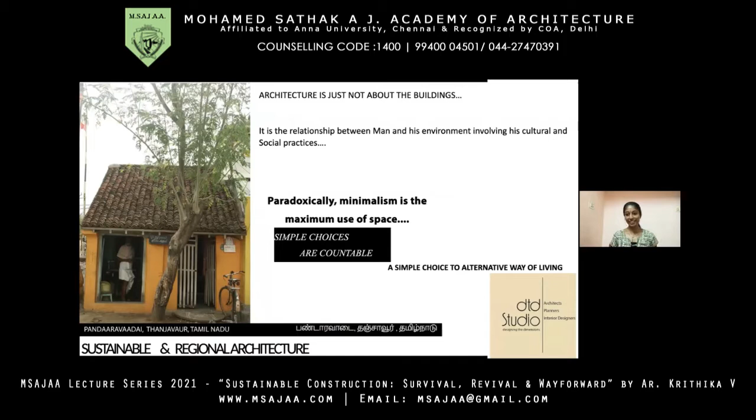So we'll talk about sustainable architecture and what kind of experience we've been taking through for the last two years. It's more about regional architecture and how the relationship between man and his environment, along with social practices, go together. We are actually, as a team, looking into eco-friendly architecture on a holistic purpose. It involves all the decision-making part in the architecture as well as choice of materials and the planning part.

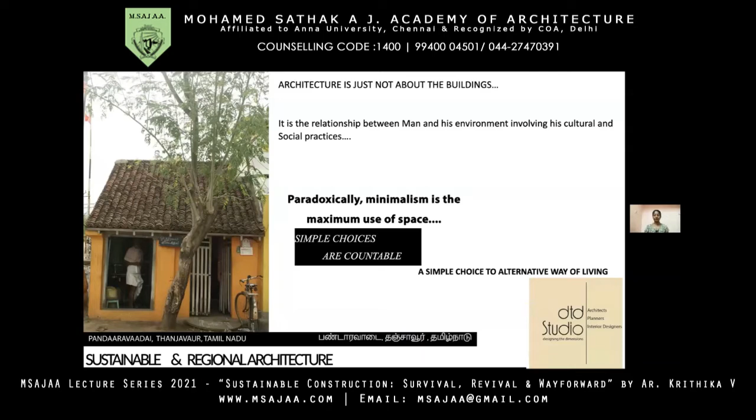Before getting into sustainable construction, I have a few images to be shown. We've always been looking at materials from a perspective from where it is not taken. So these are the images from where it has been mined, and this can actually tell lots of stories behind it.

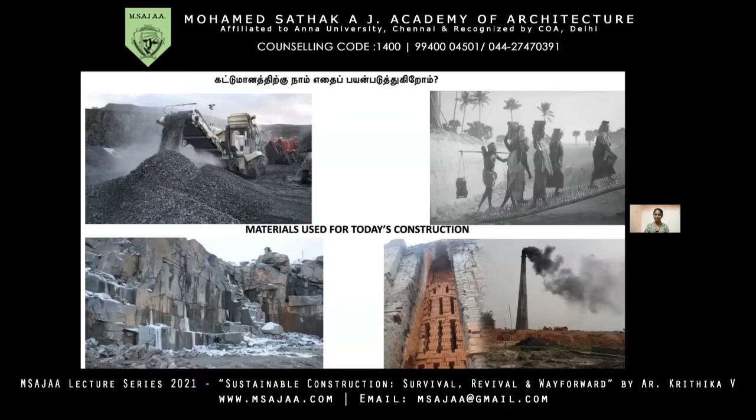So the kind of hazard that today's mining practices cause—we talk about pollution to a greater extent in the world. The construction industry takes a major role in being part of all kinds of pollution, be it air pollution, land pollution, or water pollution. These images represent the mining process and the background story of where the construction materials are actually coming from. So there's a small point we'll have to look into when we talk about mining.

When the resource of a particular land is scraped out, it cannot go back to its original ecology. The environmental assessment principles and policies talk about taking back the mining sites to their original condition, which is not possible once the mineral is out. So these are a few examples of how, when the mineral is scraped out, the kind of condition that it leaves back to the ecology.

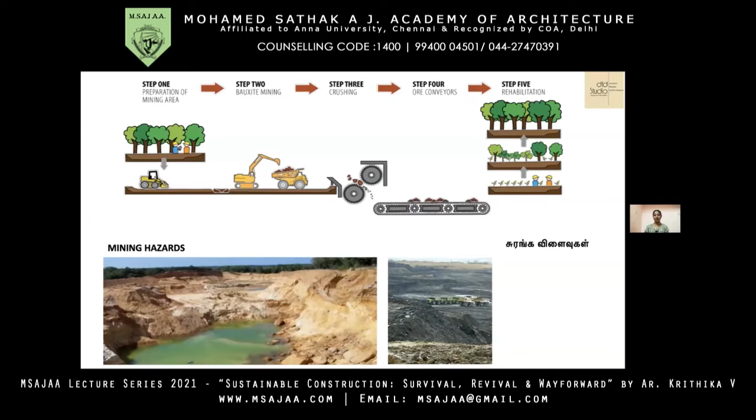I also wanted to talk about a very simple material, cement, which is completely used everywhere in today's construction practice. We look at cement as a binder, but there's more story behind it. To manufacture a bag of cement, you need lots of electricity.

The raw material for cement is again limestone, which goes through various processes to get it. For every bag of cement, you need around 20 to 25 liters of fresh water if it's a wet process, and if manufactured by a dry process, you need lots of electricity. Thermal power plants need to be supported with coal, and the list goes on.

So when lots of resources are going into getting a material manufactured, how long does cement actually retain on this planet? How long does a concrete building actually stand? The lifespan is being degraded very fast, and there's only around 60 to 65 years of lifespan given to a concrete building. There are also lots of principles behind it, like the amount of lime content in a cement bag. So just to put it simply, we're spending so much resources for a building that's going to get demolished in the next 60 years.

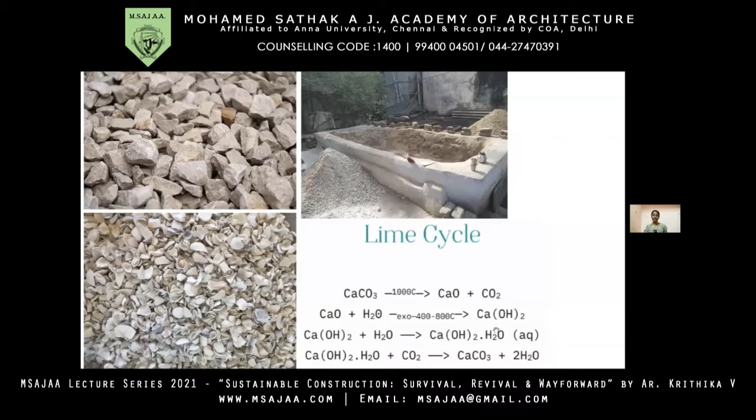Let's talk about a small comparison of cement and lime. From around 800 to 850 kg of limestone, we get less than 128 to 130 kg of cement. The rest is sludge, a waste, because it's processed already at a very high temperature. Whereas in the case of limestone getting into lime, there's less than 0.5% waste. That is also one of the reasons why we're using very fewer resources comparatively, and the flexibility and plasticity of lime is really high. So the usage of lime can be extensively high compared to cement.

As I said, we're talking about regional architecture, so it's also very important to understand where the material is from. We cannot say all the buildings in and around Tamil Nadu are made of lime. No — when people get lime, they use lime; when people get earth, that is soil, they use soil for plastering. So it also depends upon the context, the climate, and the wind patterns there.

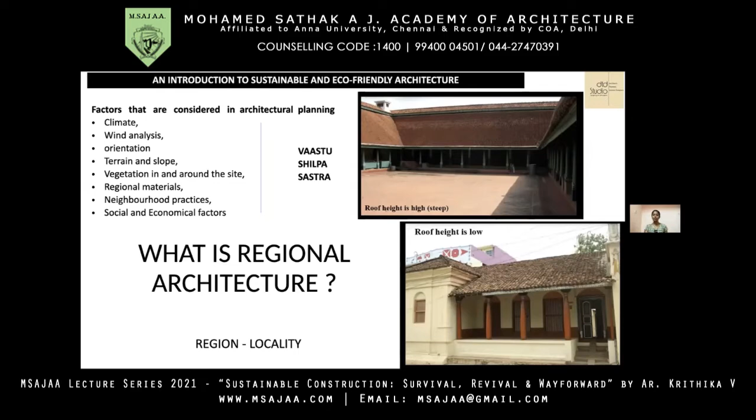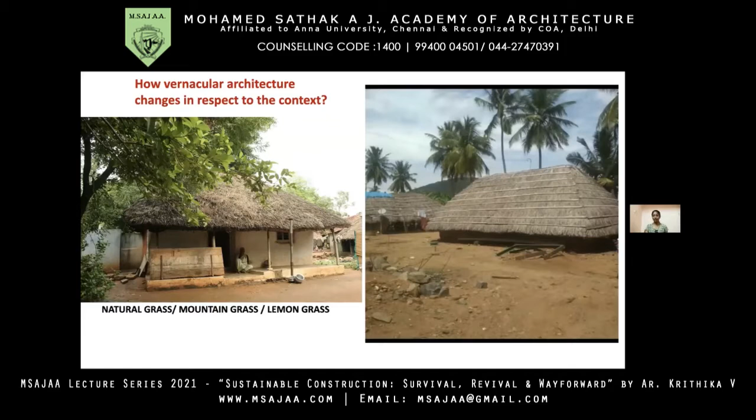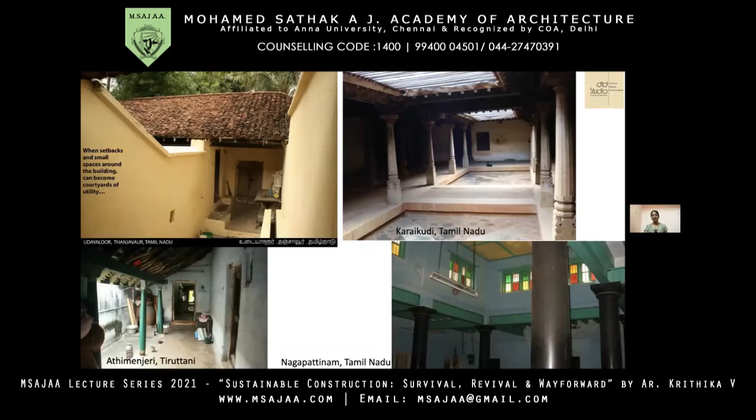The fourth image talks about Nagapattinam. As we know, it's a high cyclonic zone near the coast, so people did not have open courtyards. Instead they had a stack effect through ventilators placed 12 to 14 feet high. These kinds of courtyards show how to design in a way that suits the climate, since sustainable architecture is also about understanding the climate and working with it in design.

Here's an interesting example about streetscape. We often read about Western standards of anthropometry and urban principles that call for windows facing the street to give social security to the space being dwelled. But we've always had that already—we never had compound walls or partitions separating streets from houses. That kind of connectivity has always been there.

We've always had usage of spaces on the floor, with very minimal furniture. So windows were placed low, at floor level, to let in good breeze. It's only when we use furniture and raise windows to the Western standard of about 3.5 feet that we bring in other furniture or different usage of space.

The other images show very little asphalt on the roads—this relates to Christopher Alexander's principle, which I found applied here in Tamil Nadu. Wherever there was vehicular movement, they paved the ground; the other areas were left completely open. This speaks to the definition of open space—we think paving and enclosing an area and leaving it open counts as open space, but no, leaving it as natural as possible is the real definition of open space.

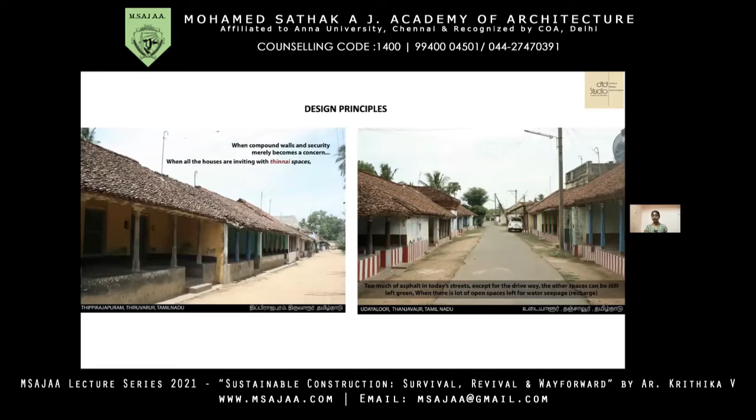Water has to percolate well; there should be soil for it, and breathability of the material happening. This is one example of that. So when we talk about architecture, it's not just about buildings—it's also about water management and watershed management.

This is an example I found in Ramanathapuram, a small village called Abiramam. On the Google map you can see it's marked with the Kanmai, a water body. Ramanathapuram is a very dry district, and this small village is entirely supported by this Kanmai—showing how well watershed management was planned for a dry district in Tamil Nadu.

But now, even when we get enough rainfall, no water is being stored or utilized properly, whether it's rainwater or fresh water sources like wells or bore wells. This is another example I'd like to draw from the planning principles of our state.

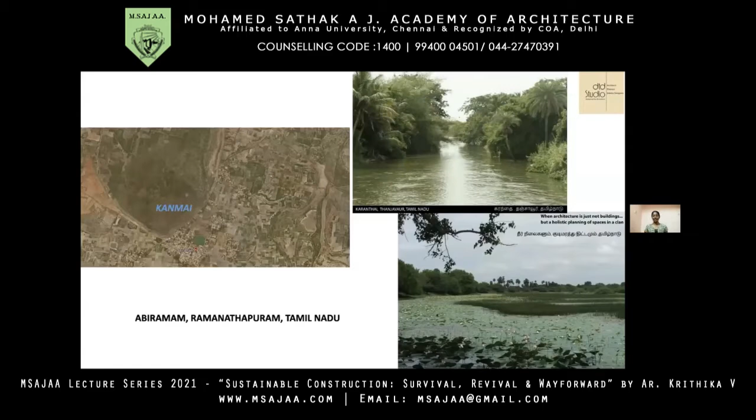So now let's see a small example of how we took ourselves into a project. This was the first project that we did, and it was in the rural area of Tiruttani, in a village called Athimenjeri. It's a very dry area, with extremely high temperatures in summers as well as winters. You can see the mountainscape - that's exactly where the site was, studded with mountains on all sides.

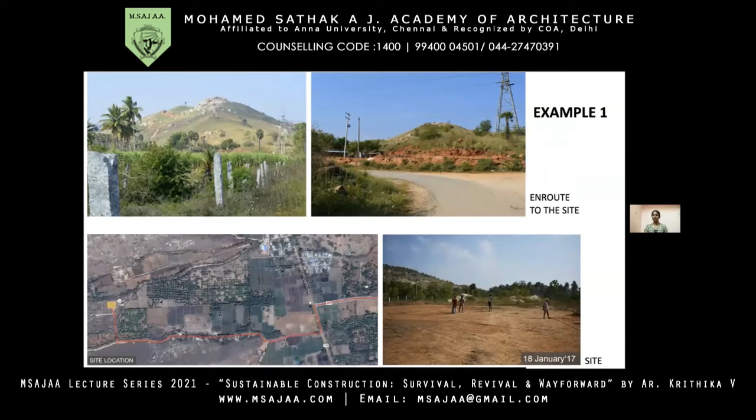Before getting into the project, this aspect of site study was very important. We actually think of understanding the local materials, local buildings, because there are lots of differences between understanding from the local perspective as well as learning it theoretically.

We all would have read about random rubble foundation, built using lime or cement mortar. But here people built it with soil, just soil. Some people did not even use soil - they just interlocked it so well that it was, at its proper neutral axis, gaining the strength. So lots of examples that we can take and understand. This is an exploration for us, as well.

The soil is completely different from each and every place - the kind of clay, silt, sand proportion in the earth, the lime and silica that acts and tends to hold the soil together.

For example, if you can see, this hut has been around 15 years old. It's not plastered, it's just carved. There's no lime stabilization - it is holding very good because of the lime already in the soil. So the understanding that people had with the soil condition helped us to improve our knowledge and wisdom on sustainable architecture.

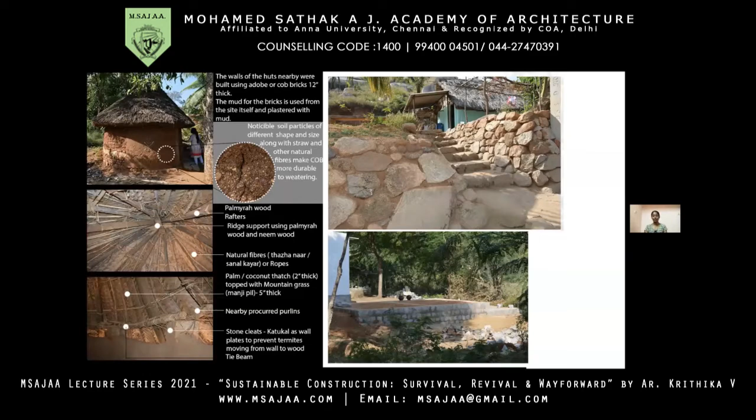So this is a very simple plan. The southern part of the building was completely protected with a veranda, which is blue in color. There was a small living along with a kitchen dining space - it was a combination, we did not want to separate, so it was a family activity that was going on there.

There are 2 yellow spaces marked, which is used for sleeping, and there's a common toilet and a bath area. The toilet system that was used was dry toilet.

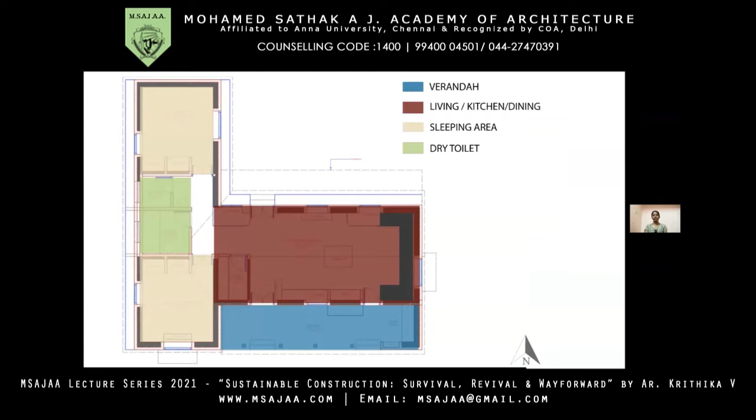So let's come to that again. The foundation here was done with random rubble. An old building was demolished and we just got the stones from them - we reused the stones for the foundation.

Sometimes we understood that drawings, when done theoretically, don't work there, because the size of the stone all depends upon the foundation drawing, the height of the foundation, the plinth level and things like that. So that's one thing.

Here the interlocking was done very properly by the local artisans, and it was completely filled only with earth - I mean earth lower than the subsoil, the soil or mud below the subsoil, which does not have any organic matter. It's been pugged well, fermented well, so that the soil particles are loose enough to bind the stones together. It's just used for filling in between the gaps, whereas the complete stability of the foundation is based on the interlocking technique.

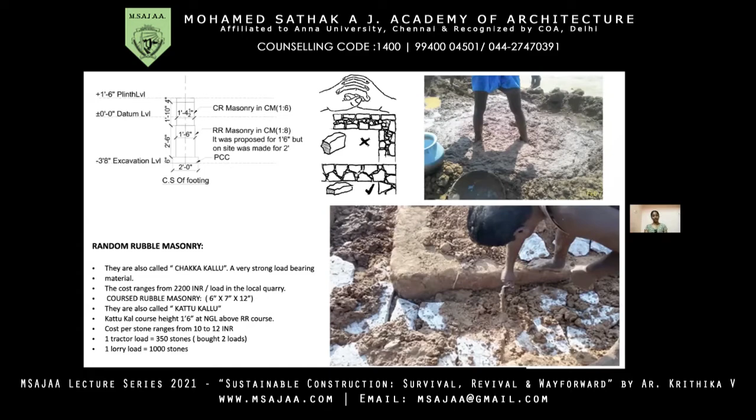So this is for the plinth - we've used coursed rubble, and that is to raise the building. Since it is a very high terrain, we do not have to raise the building for more than 1.5 feet. That is also to stop the conductivity of water from the ground level, because we are planning for mud walls.

The wall system is a combination of adobe and burnt bricks. Why so? Because lime is not a local material here, and we did not want to extensively use lime, bringing it from a different place - so plastering was really difficult in this part. So we thought of doing exposed brickwork on the outer side with burnt brick, and a combination of adobe on the inner side, where it can be plastered with either mud or cow dung, or a different material other than lime. It's a 1.5 feet thick wall, and it works by interlocking method - both materials, we made sure there is proper interlocking and interwoven, so that the two materials don't separate from each other.

One important thing to be noted is the compression of a sun-dried brick is completely different from that of a burnt brick, and there's a little difference we found. For example, if you make an adobe brick of size 9 by 4.5 by 3 inches and allow it to dry, it shrinks by 1 inch on all sides. That was one important learning, how the material differs when it is being interwoven and things like that.

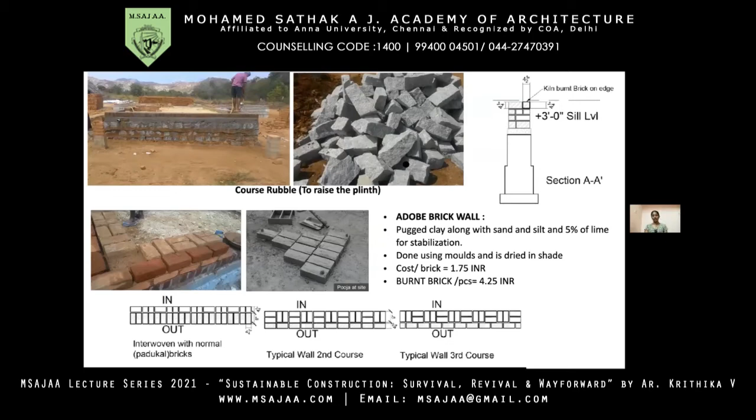To talk about the doors, windows, all the wooden parts of the building, they were all reclaimed. We were not planning to go for any new wood, because in today's condition, new wood is completely tender. They are not grown trees, less than 10 to 15 years of age. They've been cut, and not seasoned.

In a mud building, it is very difficult to install such a wooden member. It's difficult, and in a concrete building there will be lots of expansion according to seasons. So it's good that we use a very strong country wood, which is reclaimed as well, since the life of wood is really high compared to that of the building. So all the doors and windows we installed are of country wood, which was procured from an old building that was demolished. The mortar for the wall system was again mud mortar stabilized with lime.

For the treatment process, we actually scraped out the paint that was there, and treated with cashew shell oil and linseed oil. Cashew shell oil on the sides of the frames where it touches the wall, because it's highly corrosive in nature, and it really protects the wood from termites and borers. The other part of the wooden structure, with linseed oil, which can make it waterproof and also help prevent termites.

So we actually do not advise any volatile organic compounded paints or varnishes inside the building. There was a research paper done by IIT Madras that talks about how bad the indoor pollution in Chennai is compared to outdoor pollution, because of the paints we use, the vitrified materials, the MDF boards, all the PVC materials, and things like that.

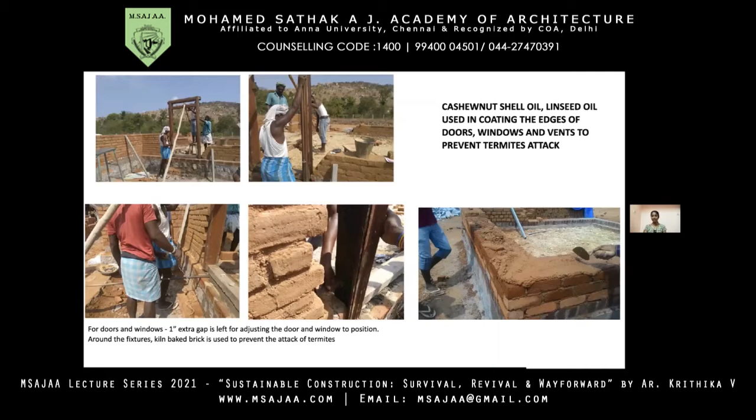They keep on releasing aldehydes, like formaldehyde, into the air, and if you keep a room closed it's really difficult - it's a condition that leads to various conditions like sick building syndrome, and there have been lots of studies about that. So we actually do not get into VOCs either.

These are small parts of the building that can explain how it was coming up. We made sure there are inbuilt furnitures, window seats that can help minimize the furniture inside the building. So that's one part of it. Most of the shelvings were inbuilt, and since it's a 1.5 thick wall, it was easy to do that.

We also had provisions for gray water and black water, treating them and using it. The most important aspect of a sustainable building is also planning. Here, the building cannot be one where you can cut and paste or make alterations on walls or on the load-bearing structure, so we will have to plan accordingly and then work on this.

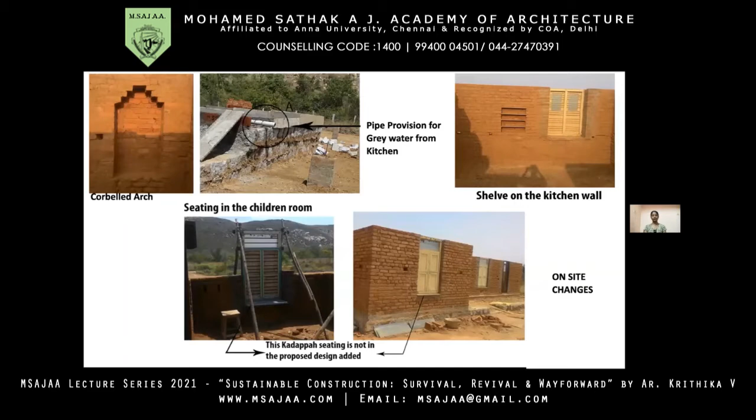This is about the procurement of the roof, procurement of the wood for the roof. We plan to go for a complete pan tile roof. The reason is there was no Madras terrace roof or any other roofing technique with lime, because lime was not there. So a sloped roof would be better because it's extremely hot in summers, around 45 degrees Celsius.

We plan to go for local wood, which was Illupai and palm. So what's the difference between country wood and teak, or why do we always consider teak to be one of the strongest woods? The quality of wood is chosen to make sure it is not affected by any insects, termites, or borers. There are 800 species of termites available in Tamil Nadu, so every context has its own species, and only the particular tree of that context will be resistant to the termites of that particular area.

So it's always better to choose and use a local tree, a local country wood, rather than going for teak, or Burma teak and things like that, as we've seen country woods perform completely better than teak.

And to talk about the pan tiles, yes, we've used completely reclaimed ones that we were able to source out. There were also new manufacturers who could make these tiles, but since we already had them, we've reused them again.

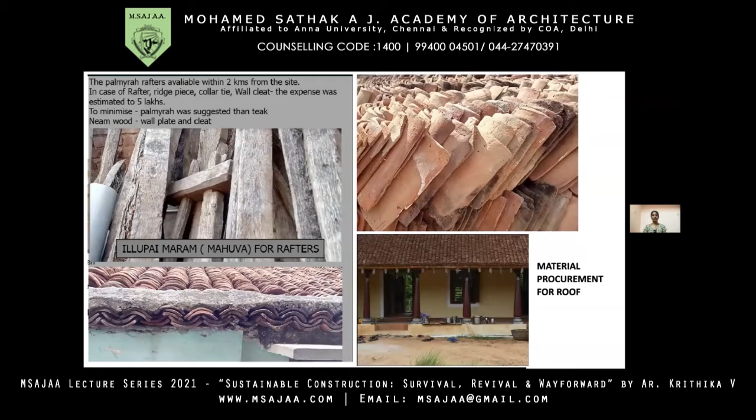This is an interesting topic about Palmyra rafters, which is palm tree wood. We've used rafters out of palm wood. The portion marked in the tree called pith is usually the part used as wood in other trees, whereas in the palm tree it's the opposite - only the heartwood, the black portion, is used, and the pith is not used.

So that's when we actually get to cut that particular region. The older the tree, the thicker the heartwood becomes. We've seen where the pith is only 2 to 3 inches, even where xylem conductivity is completely lost and the tree is probably going to die - that's when a palm tree is harvested and used. There was lots of understanding about materials that we got from local people.

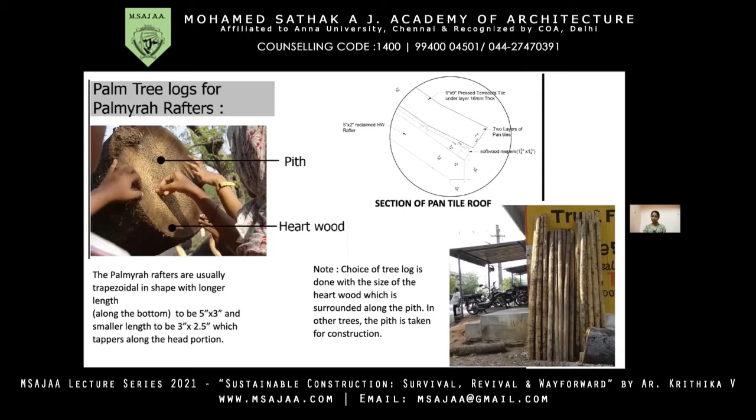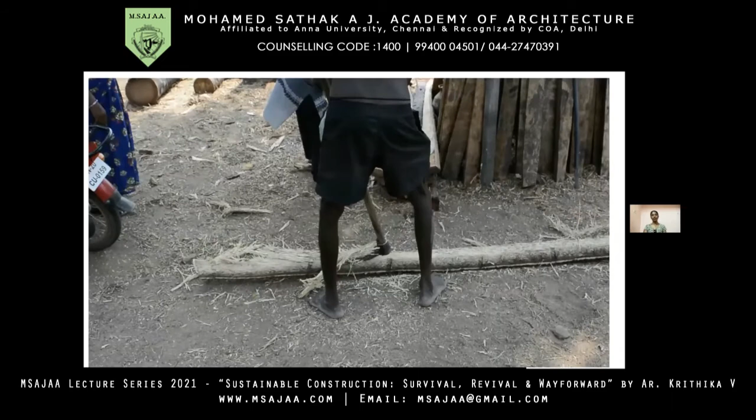So this is about the palm wood - an example showing how effective and comfortable it is working with local artisans. Most of the materials we used involved lots of artisans and not machinery. Even the wood procurement, the scraping of the pith, becomes easy with an artisan, because he knows to remove just the pith and not the heartwood. A machine cuts evenly, and there's a chance the heartwood might get cut through.

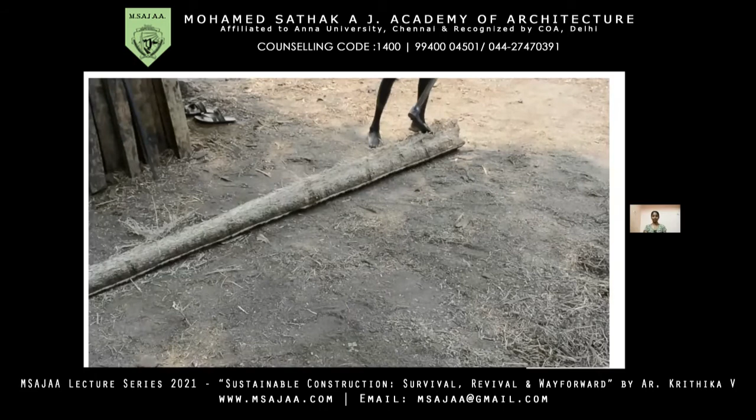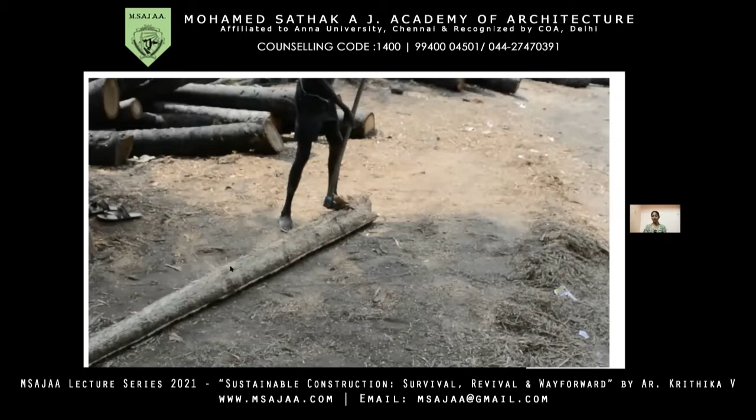So if you can see, the wood is not equal. It cannot be equal, because we're just trying to remove the pith and not touch the heartwood - that's the actual fibers. We are not disturbing the structural property of the wood on the heartwood side.

So this was when we were installing the rafters. Interestingly, in most of our projects we actually have clients working with us - that's something we like to do. It's been more of an exploration for the family as well.

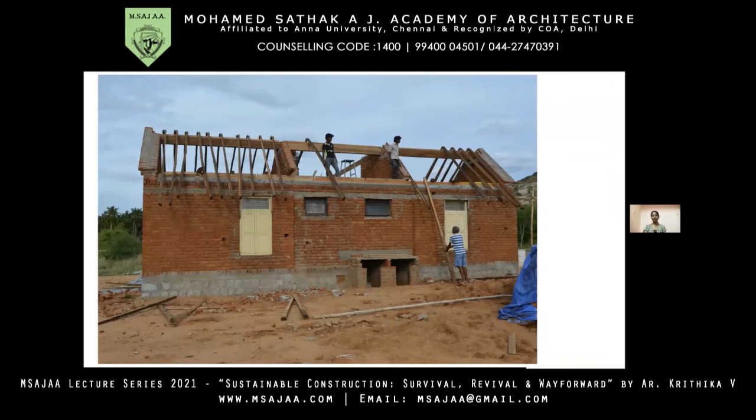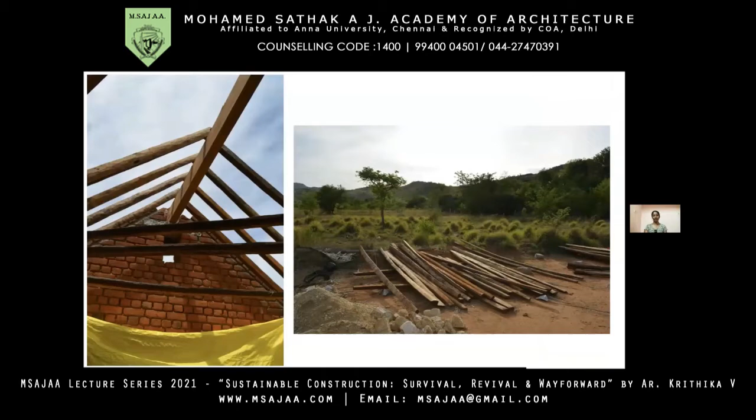So this is about how the central beam supports the rafters, and you can see how they've been joined together, and also the important property of not allowing the main beam to touch the brickwork, which has mud mortar - that's to protect the wood.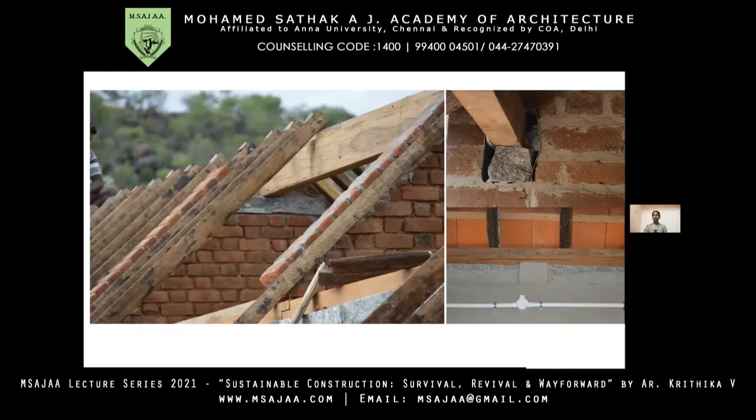Here we've been using a small tin sheet. We did not have knowledge of using any other material at that time, and now we actually have other natural materials - teak leaves, banana leaves - that help keep the wood intact. That was also used in olden days to protect the beam when it comes in contact with the structure.

Regarding the inner part, since it did not have a courtyard and we had limited windows to make sure there's not much heat in the building, we plastered it and gave a lime wash. The plastering was done with cow dung, and we lime washed it. You can see how well the family responded, and they were also part of doing it.

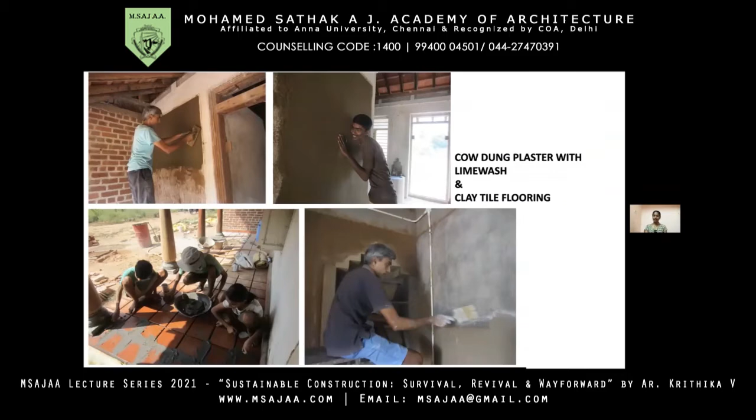The complete flooring was with clay tiles, which was again locally made by hand - so that was not a manufactured material, and it had little undulations. The family was okay with that as well.

So this is the complete structure. You can also see there are openings above 14 feet, that's to make sure the hot air leaves the building. This is not just for a sustainable building - any building should have such an opening for hot air to leave. Stack effect and cross ventilation are all part of the planning principle as well.

This is the front part. It was a self-sustainable building because it works on its own energy. We've installed solar panels, and there's nothing like sourcing external energy since it's at a farm - that's how it works.

So you can see the main door, which is being treated with linseed oil, and the other parts of the pillars, which is again reclaimed, and the window seats, how we actually plan to use it to reduce the furniture, and most of the shelvings are all inbuilt.

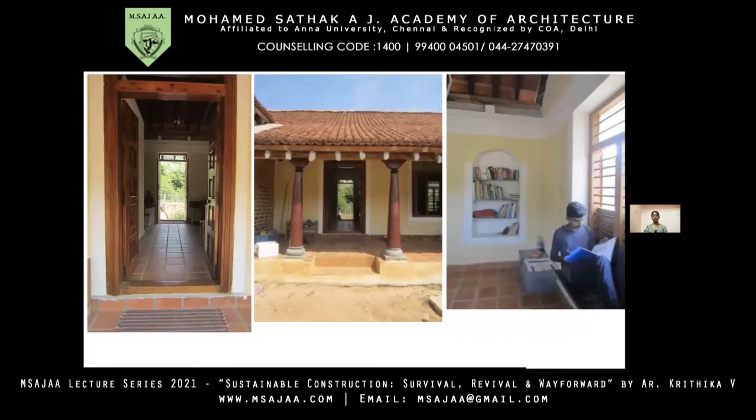So this is the inner part of the living area and the kitchen, where it is a combination of living, kitchen, and dining together. So mostly Thinnai was installed near the window spaces, and yeah, so this was in the daytime without any lighting.

So to talk about the waste management, the client and the family was really supportive to go in for dry toilets. A dry toilet is nothing where you don't use water for flushing.

So here in Tirthani, there's lots of water scarcity, and to dig a borewell, you need to reach around 300-350 feet. So this is like a common depth that people go in the villages.

So now we've thought of doing this, where your fecal matter and your urine is collected and is being used in the farm, after decomposition process.

So there's this black bucket, which you can see, which will be filled with sawdust. And once you use it, you just have to sprinkle that. And there's no smell. There is no attack of any termites or insects, because usually when there's fecal matter, there'll be lots of other organisms getting attracted. So you don't find anything as well.

So this has been 2 years, 2.5 years, and I think it's been successfully growing. This is also one of the techniques that was used in the olden days. So this is about that project.

And to give a small comparison about a project that we worked on in Chennai, a comparison of a rural and an urban area. So I could not call it completely urban. It's a semi-urban space as well.

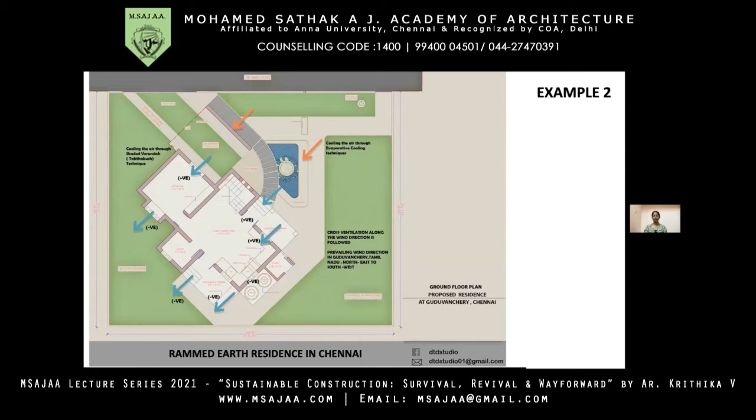So that is the reason why we had to protect the space with verandas on either side, because it's completely hot. And here again, the foundation was reclaimed.

We've used stones from a nearby compound wall, which is demolished, and we've reused it again. Again, mud mortar stabilized with lime was a part of this structure. And as you can see, there was proper interlocking, and the mud mortar is just a filling material between the gaps.

And to make sure that an insect or nothing goes inside, it is just a packing material. So the structure itself works based on the interlocking technique only.

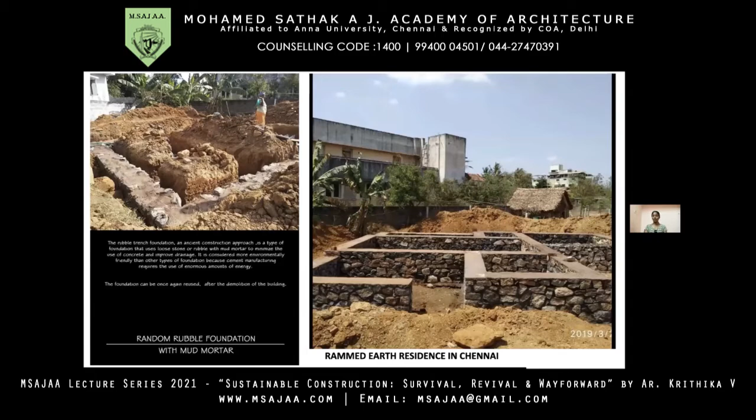And the wall system that we went here was rammed earth. So it was a 1 feet 3 inches wall.

Stabilized with lime. So there are two different types of rammed earth. What I mean by rammed earth is nothing where you have a shutter. You just mix soil according to various proportion of clay, silt, sand, along with the stabilizer. Stabilizer is nothing but a binder. So we've used lime, and you ram it in such a way that it gets compressed well and reaches its maximum compressive strength. So this is how it works.

You can see there are waves on the walls. That is basically every layer which is getting compressed. So actually, there would be only 1 feet or around 9 inches of soil that will be put inside the shutter and compressed to around 3 to 4 inches. So this is how a rammed earth works.

And the other kind of rammed earth wall, which has been evolved by various institutions like Auroville, is stabilized with cement. But here we did not want to bring in cement. So that's the reason why we thought we'll plaster the walls with lime and go for a lime stabilized mix, because stabilizing with lime is not going to give you that kind of finish where you can leave the wall without plastering.

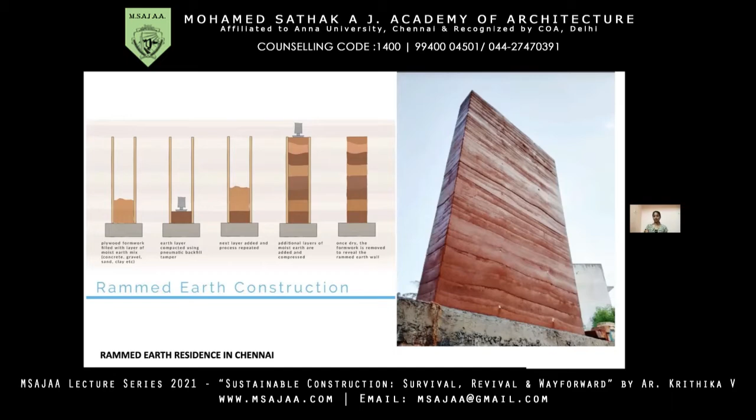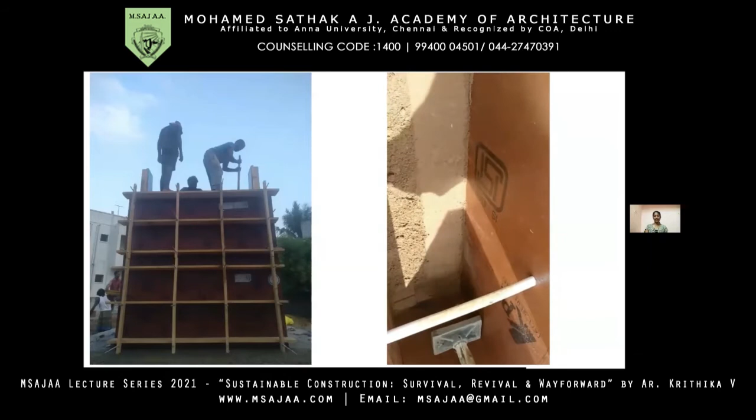So this is how it is actually compressed. The soil is very dry, so you need very less amount of water. You just sprinkle some to make sure the layer is getting cured. This is also an important point where a sustainable building needs very less water. There's no curing process actually needed, and most of the materials tend to set naturally or by taking moisture from the air.

So this is how a shutter of a rammed earth wall actually looks.

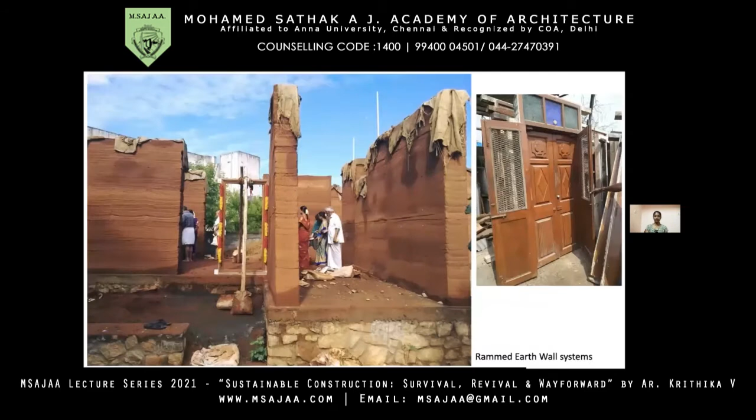You can see there are small gunny bags placed on the wall. We soak the gunny bags and place them on top of the wall so that there are no cracks, because this was done in summer and the water gets absorbed and evaporated from the wall very easily, causing instant cracks. To avoid that, we made sure the top part of the building was completely covered with gunny bags soaked with water.

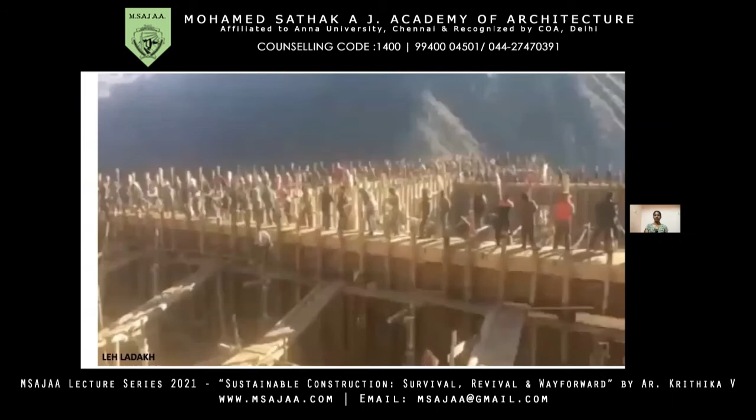So this is an example. These buildings are not new to us or an experimentation, they are time-tested ones. This example talks about a community being involved in constructing a mud building. This is in Leh Ladakh, showing the process of sustainable construction with locally available materials.

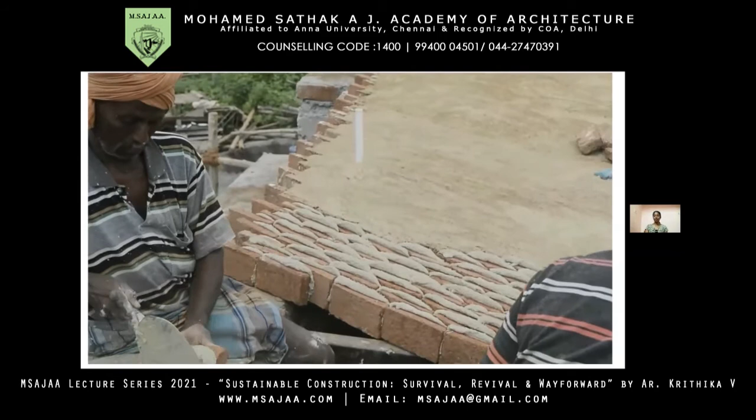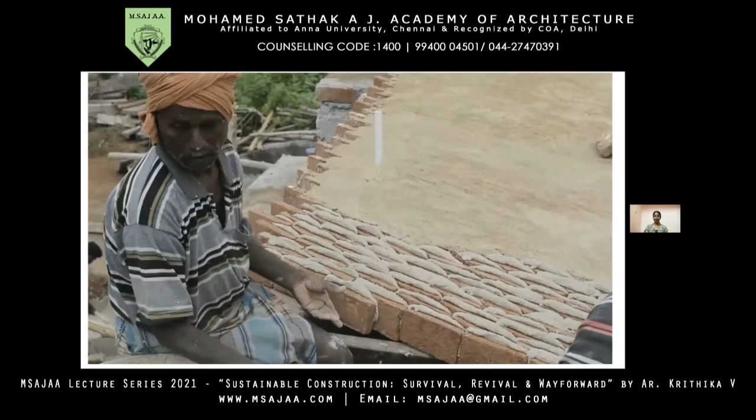A small example of how this Madras Terrace roof sticks and how it works: the bricks are actually not soaked in water, so they take the water from the lime, and that's when they get the grip to stick. The entire roofing was done only using this method, completely started and completed till the end only by sticking together.

To talk about the artisans of the entire roofing technique, we involved around 29 to 30 artisans for the entire roof. This eco-friendly, sustainable construction also supports the local economy and the skill sets of artisans, spending cost on people and not on resources or scraping out resources. That's one important aspect of this construction.

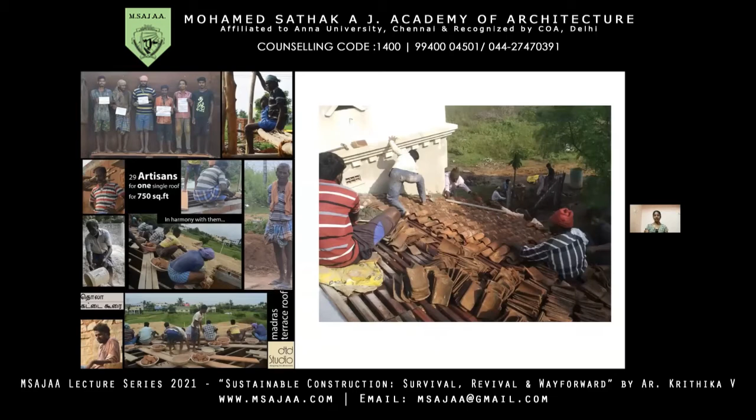The flooring technique was with lime oxide, and the colors were actually taken from original oxides. We did not want to use any synthetic oxides, since mixed colors take synthetic pigments from anywhere. So traditional colors, red, yellow, and black, were preferred, and it was completely hand polished.

Compared to granite flooring, which is polished with machines, here the complete polishing takes place only with hand, using coconut coir and coconut oil, and a little amount of bee wax. That's one important aspect of this technique.

Also, here you don't have the conductivity or cooling property into your feet. So most people who live in buildings with granite or marble flooring have the problem of ankle pain or knee pain, which is very common, and they use slippers inside their places, all because of the conductivity that happens. Here these floorings are mostly warm, so that's also one of the reasons why it actually supports your health.

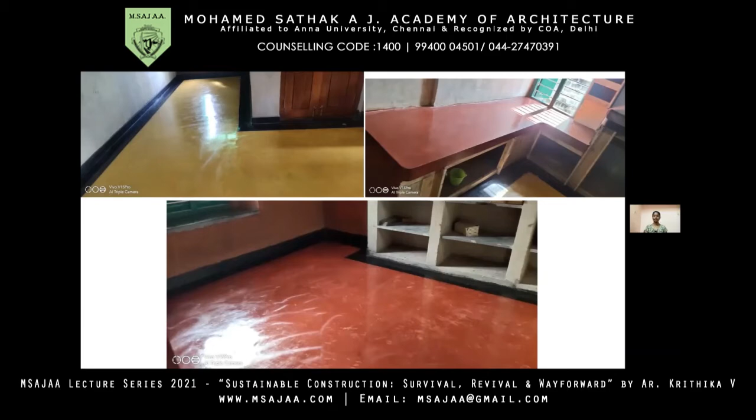In a city, we did not have a response of going in for a dry toilet system, as it was not always acceptable. So here we made sure that the water from the kitchen as well as the black water was treated properly.

The first part of the image shows a process where your gray water, that's your kitchen water, is getting treated with a species of plant called Kalvazhai or Canna. They actually eat up the soil, soap particles, using an aerobic reaction.

The other part is called a twin leach pit system, where there are two leach pits with jali walls, and lots of soil is left undisturbed below. Every time waste enters the soil, the bacteria in the soil helps to decompose the fecal matter. This kind of leach pit system also has some constraints, like the soil has to be airy and has to have a certain amount of bacteria for it to work.

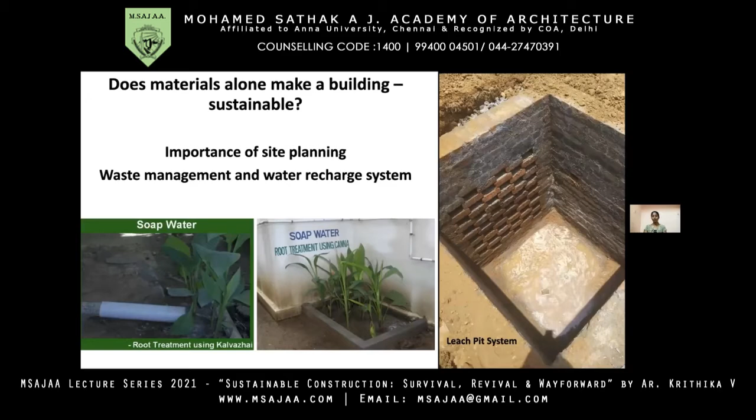Also, most important, we are not supposed to use any kind of harsh disinfectants for all these things, because it's going to disturb the growth of bacteria, and the aerobic digestion might not actually happen. So choosing to live in this building is also more to do with the lifestyle and choices of living.

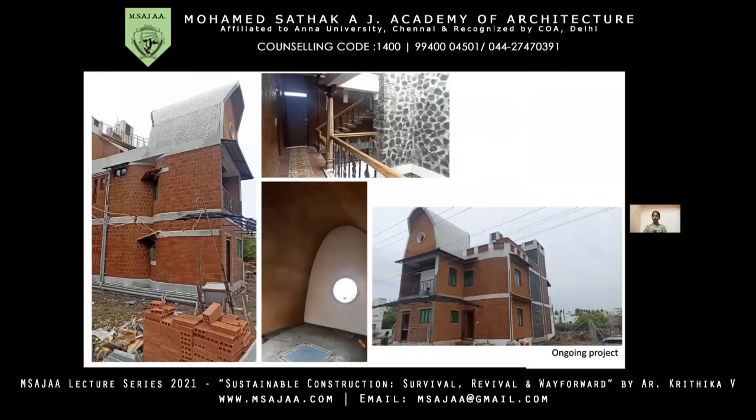This is another ongoing project, completely with laterite, and the roofing systems are with brick wall and jack arch roofing.

The complete wall has been constructed with kandikal, and some parts of the courtyard are used with random rubble stone and pointed with lime. This is another example and an ongoing project.

These are some of the inner images, where you can replace your waste concrete slab with cut stones or granite stones, and Athangudi tiles for roof slabs. So there are a few examples.

The final question, whenever we talk about such buildings, is about the cost — a common question. Yes, these buildings are costlier, but not costlier in a way that destroys the ecology of a place or another person's livelihood, because we actually don't think about the relationship that we have with the environment. We could actually relate this when we went to the mining places — mining of limestone, granite, or river sand mining.

When someone says there's no water in the well, no underground water available for agriculture, it actually relates to resources being depleted or exploited in a particular area. Most of the water crisis or water scarcity issues in Tamil Nadu are because of complete exploitation and scraping out of resources. We don't take those costs into mind, we only think of paper money, but there are lots of cost factors involved. We are not the direct paying community, there are other people who actually bear that cost.

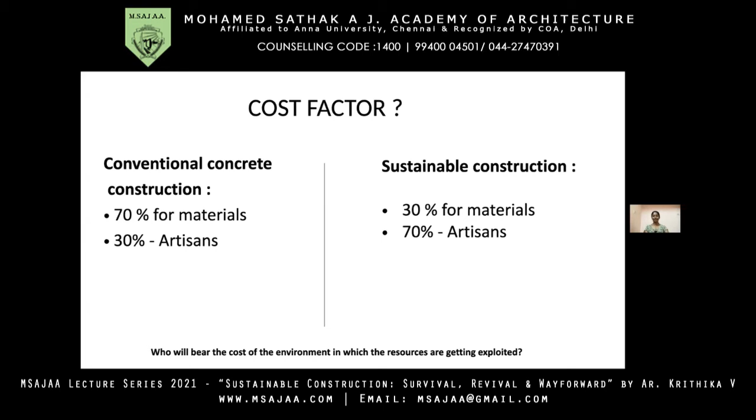There are many questions online, so shall we move on to that? One common question that has been asked by many: what is the overall cost factor for each project, with respect to sustainable construction? I think the last slide touched on that, but perhaps you can respond from your viewpoint.

The difference was because lime was greatly used, and lime is costlier compared to cement. The other part was also transport toll permits, and we don't have proper storage space for materials, so we had to take them in very small lots. That was costing us a little more, and such practical difficulties added to it.